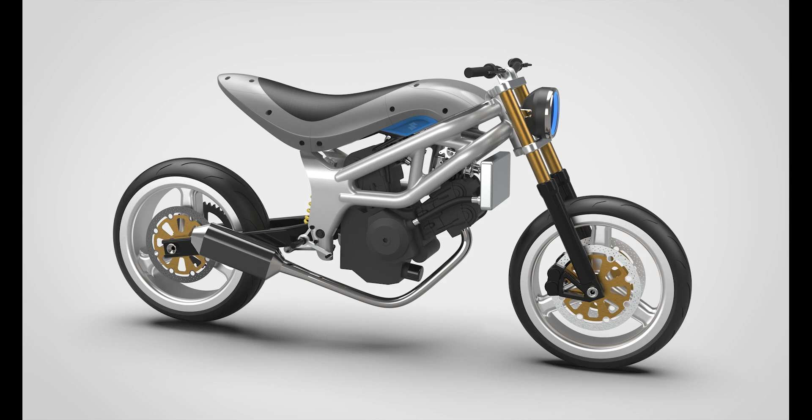This is a motorcycle I designed based off of an old SV650, and in this video we're going to go over how I made the triple clamps.

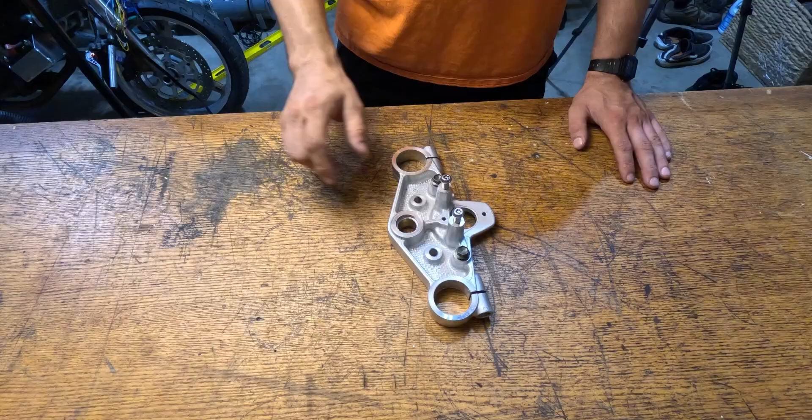Okay, this is the stock top triple for the SV. We're going to put GSX-R forks on this, but we're going to start by reverse engineering these to get the geometry right. Main thing we're looking for is the stem and fork tube location, and then a couple other little things that we can pull into the next top triple.

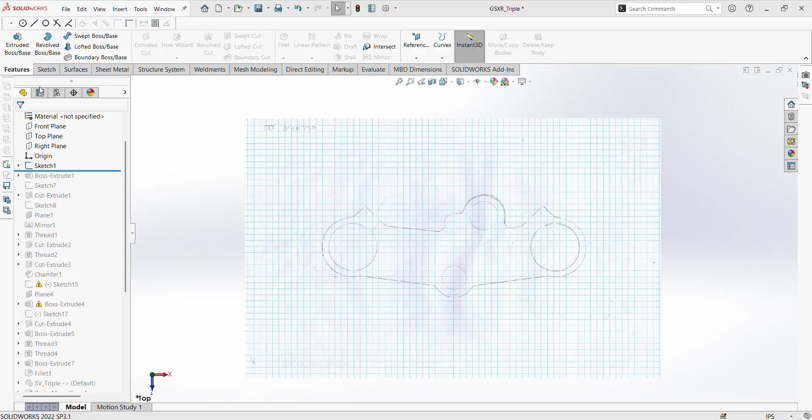That print came out pretty good. Nothing too crazy here. So the next step is to recreate the GSX-R top triple. Same thing, we'll jump into CAD, trace it up, call out the key features, add in a little bit more changes, and then print a prototype to make sure that all of our geometry is accurate.

So first print came out okay. A couple of things were a little bit off, a few millimeters out here or there. So went into CAD, made the changes, printed another, and then also added in some mounting locations for the handlebars and another one for the headlight.

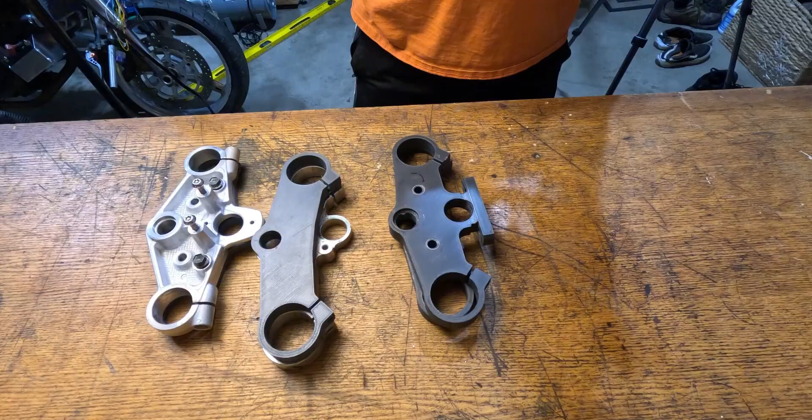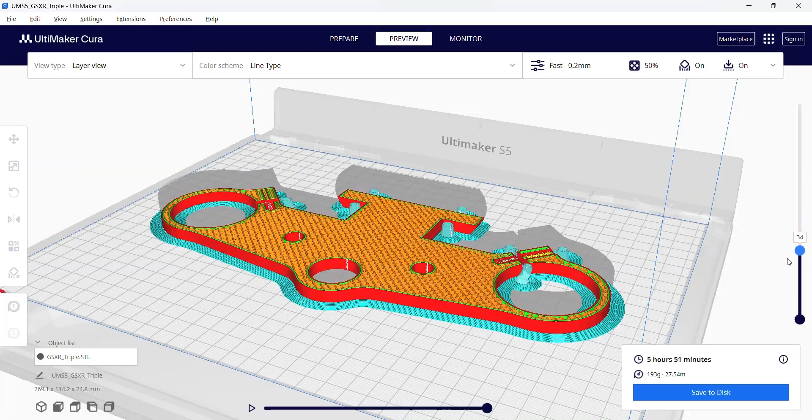And another one for the headlight, but now with a couple of other subtle changes and some updates onto the stem. And after that, we went back into CAD to finalize the model, threw it onto the 3D printer again. And then just for reference, because it's a simple part, it doesn't take much to set up on the slicer side, and print time could be better, but we'll take it.

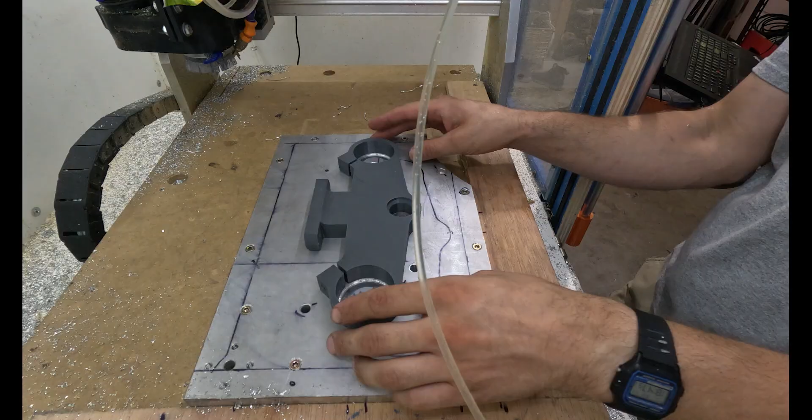After we confirm CAD is good on this final iteration, we jump into CAM programming. We're going to be running 1-inch 6061 on my little hobby CNC machine, so it's going to be a tall order for this guy, but we're just going to try it and see how it goes. You can see here I'm confirming location on the part in relation to the material before we send it.

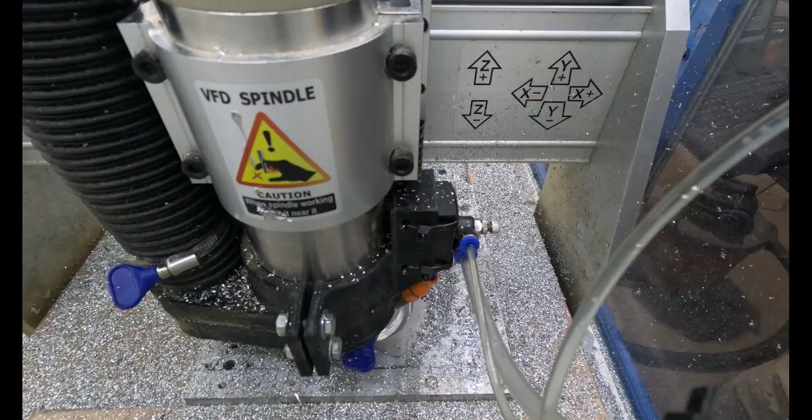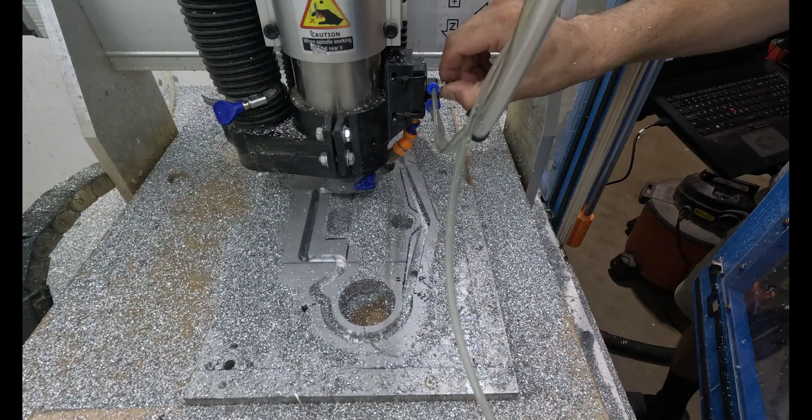So the real challenge in running this operation on this machine was keeping the chips and coolant out of the tool path so that the tool doesn't get gummed up and the surface finish doesn't get kind of crappy. I could have set up the material a bit better, meaning I could have removed all that excess and given the chips an opportunity to clear entirely out of the way, but really wasn't sure how I was going to do this, seeing as it was my first real run of a piece this big on this machine.

So I'm happy with how it came out, but you can see I have to go in and use a paintbrush to clear the chips out while the machine is running. I'm also constantly tweaking the pressure on the mist, so a lot was learned here, and it did work, but I think there's just things that I could do better on the next one.

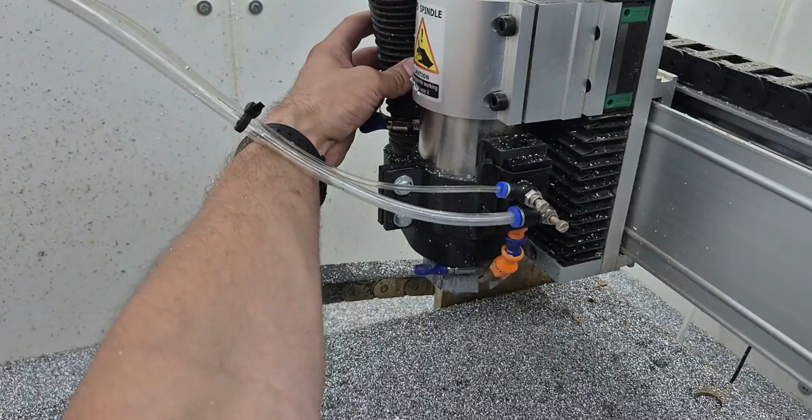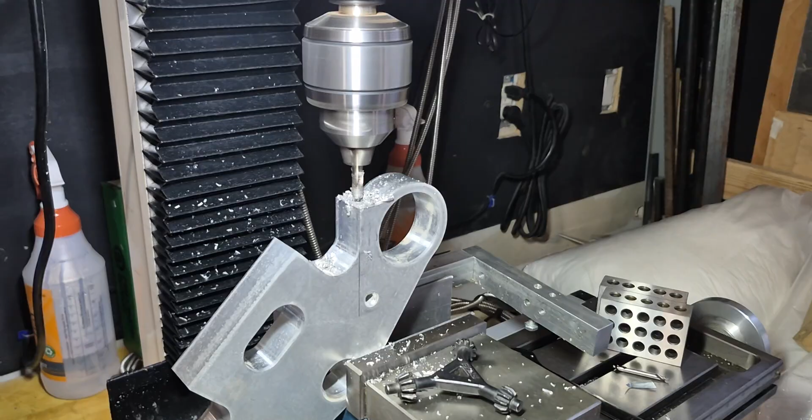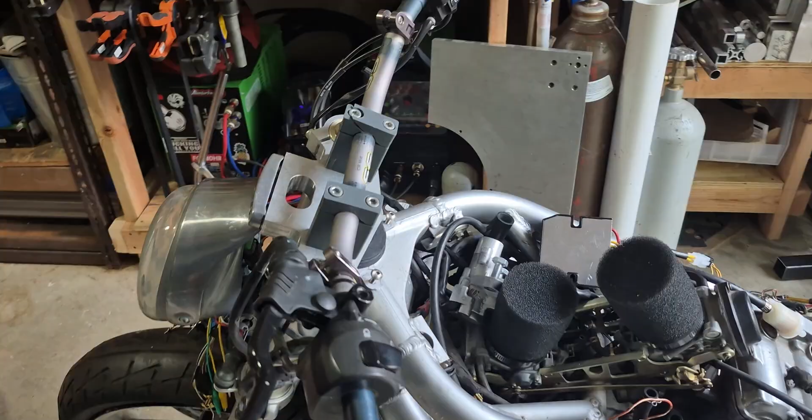After we pulled the part off the machine, chucked it into the mill, drilled out the clamp holes. I didn't show it here, but I also used a bandsaw to cut out that slot for the triple to clamp down onto the fork tube. And here we have it mounted onto the bike. So it worked. All in all, I'm happy with it. Learned a lot and look forward to making the next one.

Speaking of, there are a few things I'll change in the future on the design side. Chamfers, a little bit of geometry, that sort of thing, but there are some obvious things that I could do on the machining side for the next iteration to make the whole operation easier, so I'll go over that now.

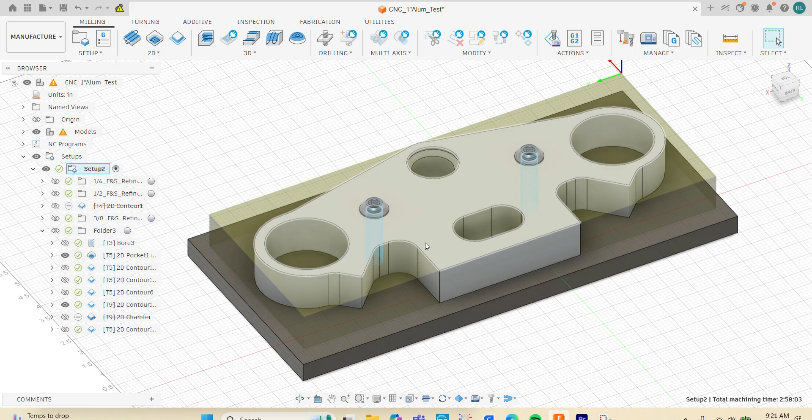What I'm going to do is make the rough stock much smaller and screw the stock that I'll be machining down to a fixture plate, and then that fixture plate will be fixed to the aluminum extrusion of the CNC bed. I think that will give me a bit more rigidity in the part, which should yield a better finish on the surface. And then also, because the stock is going to be much smaller, I think it'll allow for the chips to clear and evacuate from the tool path as the part gets machined.

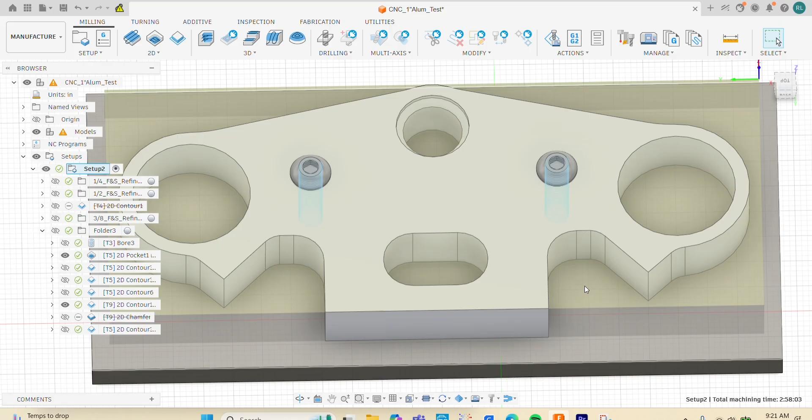It should be pretty simple. I might even rough cut the stock to the silhouette of the part before I machine it, just so that there's even less material. The only thing next that I'll try and solve before I run it is some sort of evacuation for the chips in these pockets. I did notice that they filled up pretty quick, and I had to go in and hand vacuum out the chips while this part was running, but I'm confident I'll find a solution by the time I run this next iteration.